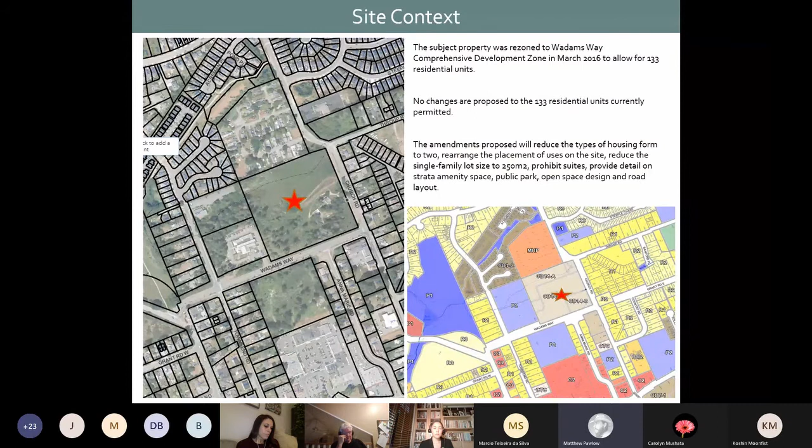The rezoning proposes the following map changes. With Area A, single-family dwellings will now be dedicated towards Wadams Way and Church Road, creating a perimeter design that interfaces well with the surrounding properties. Area B will strictly be dedicated toward multifamily units and proposed as townhomes. Area C will be dedicated as park, which was previously a multifamily site.

Area D from the current zoning will be removed and is being provided as the necessary park space, as previously mentioned, as Area C. So you can see on the right side of the screen, that is what the map is being proposed to change to in the zoning bylaw.

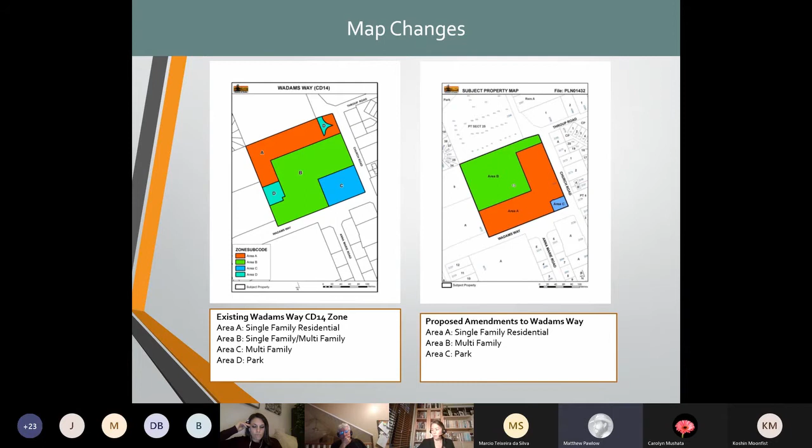As the current zoning is in place, allowing for 133 units, the proposed rezoning maintains the density and uses. Specific to housing form, only single family and townhomes will remain, with the removal of duplexes, apartments, cluster dwelling units, and assisted living facility. A reduction of 100 square meters to lot size is proposed, along with a 5-meter height reduction to multifamily units and an increase of half a meter in height to single family dwellings.

Value has been added with the allocation of strata amenity space for additional playground dedication. Parking requirements have been met, plus 31 additional on-street visitor parking spaces have been provided within the proposed developments.

The map here that you can see is the proposed open space area. So the blue dash line is the area indicated in the courtyard, which will be part of the private strata area for use by those residents. As you move to the right of that, there's a solid red lined area, and that's the proposed strata park area that will have a statutory right of way for public use, and it includes a children's play area, sport court, and lawn area, which is just under 1,000 square meters. So that would be open for the public to use.

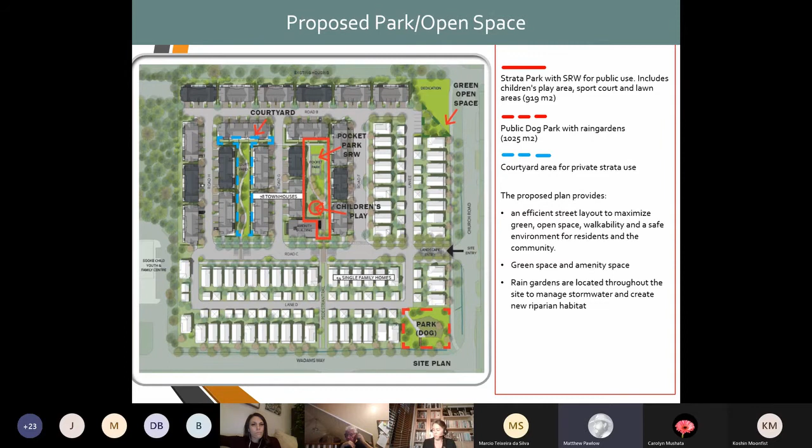This map here shows the proposed road classification. There's a mixture of public roads, which are that pink purplish color, as well as the blue strata roads, which would be maintained as part of the strata townhouse location within that portion of the proposed development. A TIA was provided and recommended single access off of Church Road.

With a 1.5 parking space requirement for townhouse units, there'd be 117 parking spaces located, as well as 2 parking spaces per single family dwelling, equivalent to 108 parking locations. As previously mentioned, an additional 31 on-street visitor parking spaces will be provided.

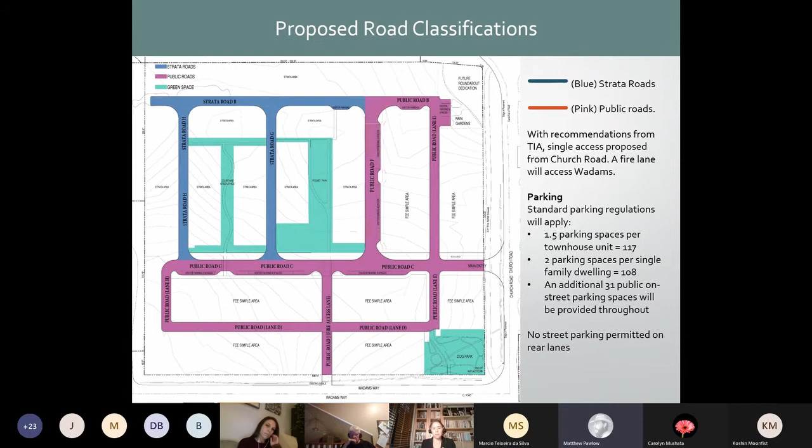On the environmental side, with tonight's attendance, the applicants will be presenting some further information on this. So I'll just at a high level touch on what's been provided and reviewed as part of the application.

Department of Fisheries and Oceans visited the site in November 2019 and reviewed the proposed ditch realignment works, which consist of removing the riparian vegetation adjacent to 2 non-fish bearing ditches, and redirecting those ditches into constructed vegetated swales and rain gardens. The combined areas of vegetated rain gardens and swales proposed will provide a 35% larger area than the original 2-meter stream protection enhancement area along the northern property line.

The 2020 Riparian Areas Assessment Report indicates that the replacement rain gardens and swales will provide riparian features, functions, and conditions equivalent or better than the existing situation on the property. The rain gardens will offer quality flow, insect drop, and other nutrients, as well as new habitat for amphibians. If rezoning is approved, supporting documentation will be provided with the development permit process, documenting this further.

Proposed contributions for the site: an affordable housing contribution will be provided from the applicant at a rate of $1,000 per unit for a total value of $133,000 for the developed site. 59% of the proposed development is in the form of multifamily residential use, which exceeds the minimum requirement of 25% from the official community plan.

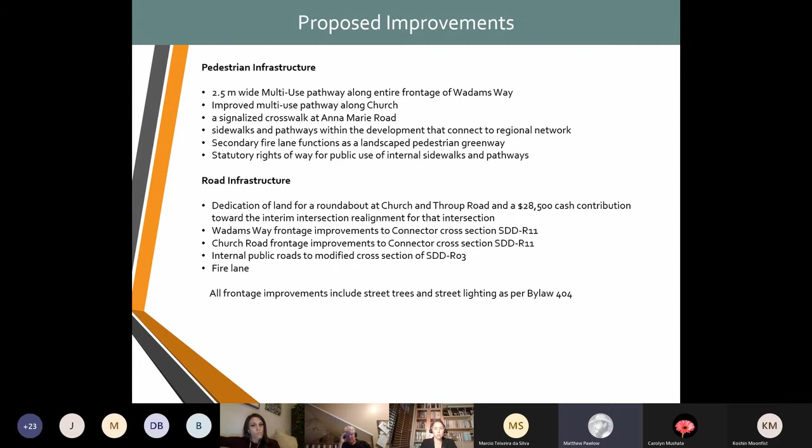Staff are recommending that prior to further consideration, an amendment be considered to recognize that the single family dwelling height is in fact 11 meters, not the 10.5 meters as currently stated in the bylaw, as well as the accessory buildings being in fact 6 meters, not 4 meters as currently in the bylaw.

Following that, staff are in support of third reading to the bylaw, and that council accept approximately 1,025 square meters of parkland dedication and accept cash in lieu for the remainder.

Prior to final adoption of the zoning bylaw, the owner must enter into a section 219 covenant to address the parkland dedication and construction, road dedication and construction, secure public use of strata green space, frontage improvements, servicing requirements, a pedestrian activated signalized crosswalk, statutory rights of way, park maintenance, and other necessary works and services. With that, that concludes my presentation, and the applicants and consultants are in attendance tonight. Thank you.

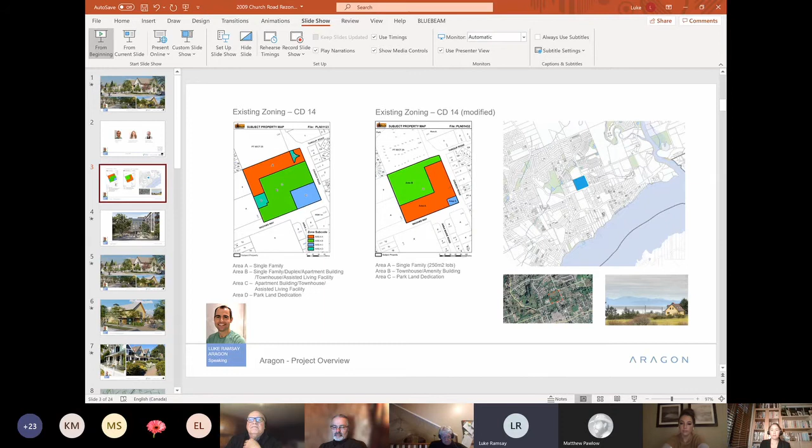Mayor and Council, thank you very much for having us today. We're here to present the project located at the junction of Church and Wadams. I'd like to start by introducing the team. Here today we have Doug Ramsey from RWA Architecture Group and Tam Bonamaison from Murdoch de Greeff Landscape Architecture. These firms are among the best in Canada and are exceptional at creating the highest quality designs, and we're very excited to have them as part of the team for this project here in Sooke.

This presentation is to present the proposed change in zoning from CD14 to a CD14 modified zoning. This change represents the same density, amenity contributions, servicing requirements, and land dedications as with the previous plan, but will change the configuration of the site plan and the housing type of the zoning from a mix of single-family, townhouses, and apartment buildings to small lot single families and 3 or 4 bedroom townhouses.

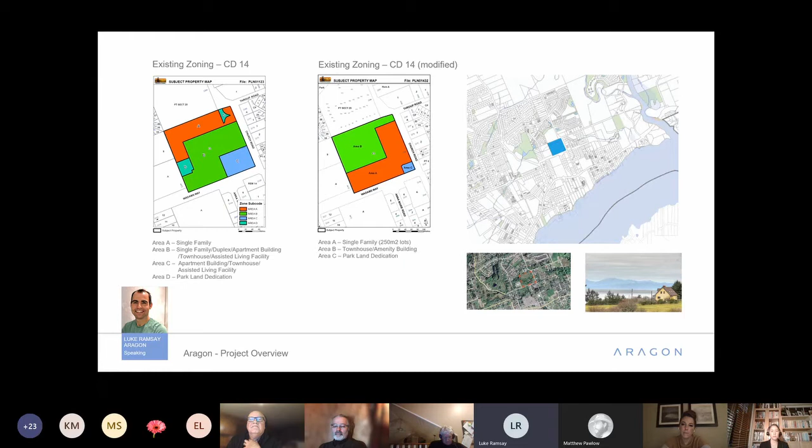First, I'd like to start with a little bit about our company. We've been building projects for 33 years and are primarily based in the Lower Mainland. We moved the project to Vancouver Island 5 years ago, where we started building our first project, Esquimalt Town Square, which is a venture with the Township of Esquimalt to transform their urban core by creating a new mixed-use space around their town hall. It's a 4-building project, which includes a new public library, uses a geothermal system for heating and cooling, offers EV charging for every residential unit, and is focused around a central plaza, which is a great location for residents to gather and access local amenities.

I bring this project to light because it provides a great example of our overarching goal here in Sooke, to provide needed housing with thoughtful design that can bring a meaningful change to the community.

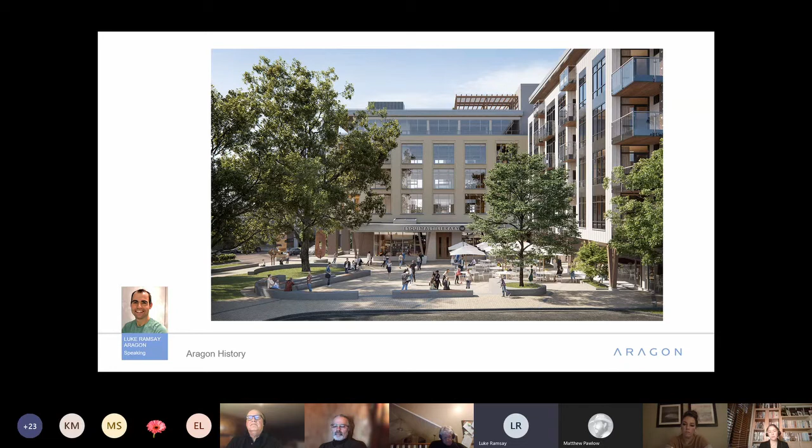Here in Sooke, we see ourselves helping build community, a community where young families can afford a starter home, a community where people can walk to the town center for groceries or through a local trail network to school, a community where people know their neighbors and feel safe. We plan to accomplish this by creating a vibrant streetscape through proven methods of urban design. This plan is perhaps different from what you're familiar with, but we hope this new housing type will demonstrate to other builders how to bring smarter growth to Sooke's core.

Through this development, we plan to bring housing choices for what is being called the missing middle. Typically, these are younger, working-class families who've traditionally been able to afford a home, but with the increase in land and construction prices, the large lots and big homes have priced them out of the market, leaving them with limited options. We're also planning on providing a new off-leash dog park, publicly accessible green space including a kids' playground, improved street frontage on Wadams with a connected multi-use pathway, thoughtfully designed landscaping and on-site rainwater management, economic growth through the creation of local jobs during construction, forward-thinking design, and quality, long-lasting homes.

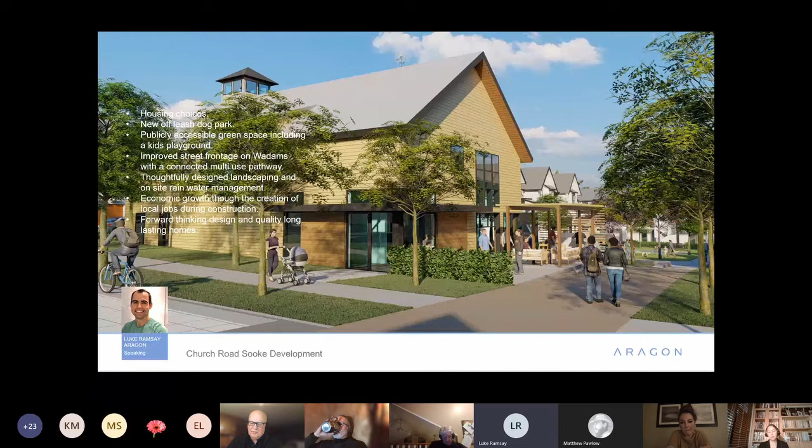With that, I'm going to pass the floor to Doug, who will walk you through some of the details of this development. Thank you, Luke. RWA has been involved in the design of housing and communities for over 30 years, and we are extremely excited to be involved in the design of this project with Aragon.

The site is in an ideal location in Sooke, only a 5-minute walk from the town center, nearby community services, parks, recreation, schools, and possibly a new library across the street on Wadams Way. A pedestrian pathway aligns the center of the site with Anna Marie Way, providing a direct connection to the town center and the new trail system on the north side of Wadams Way. We are focusing on providing green, pleasant pedestrian connections to encourage walking rather than driving, to support active lifestyles and opportunities for neighbors to meet.

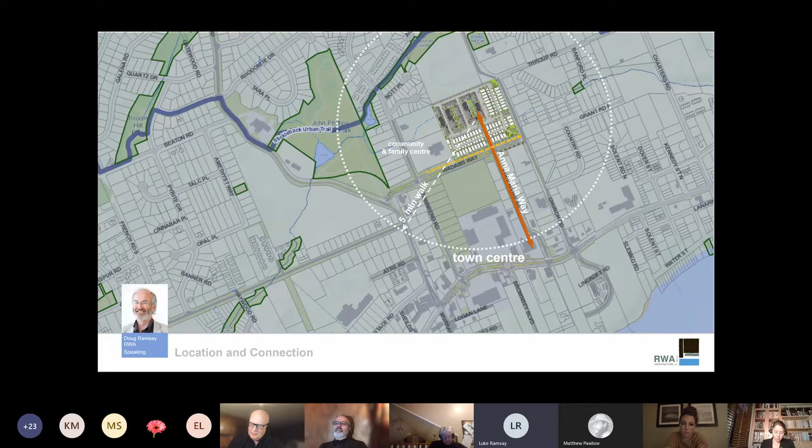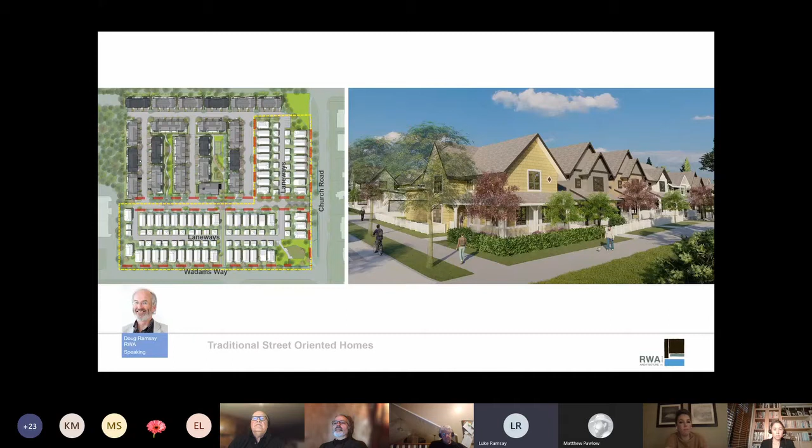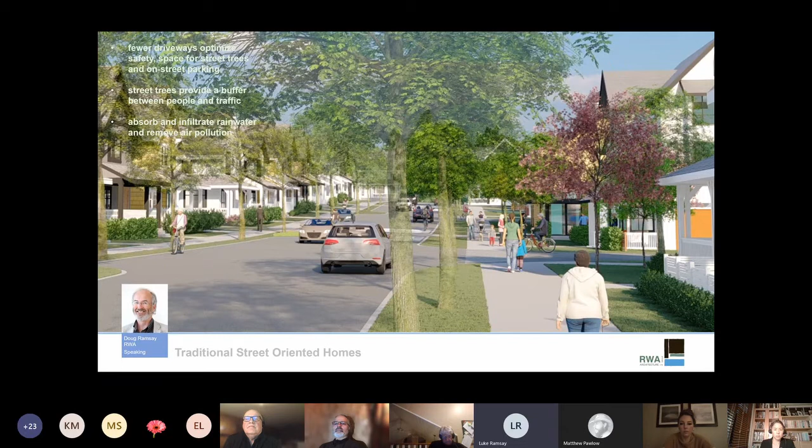The new homes along Wadams Way and Church Road are street-oriented single-family homes. This typology follows the traditional residential pattern of front streets characterized by front yards, fences, and gates, and back lanes providing access to parking and garbage pickup. This typology also supports walkability, providing opportunities for tree-lined streets with generous sidewalks and boulevards, fewer driveways, increased pedestrian safety, opportunities for street parking, and optimized space for street trees and stormwater infiltration, including runoff from the street.

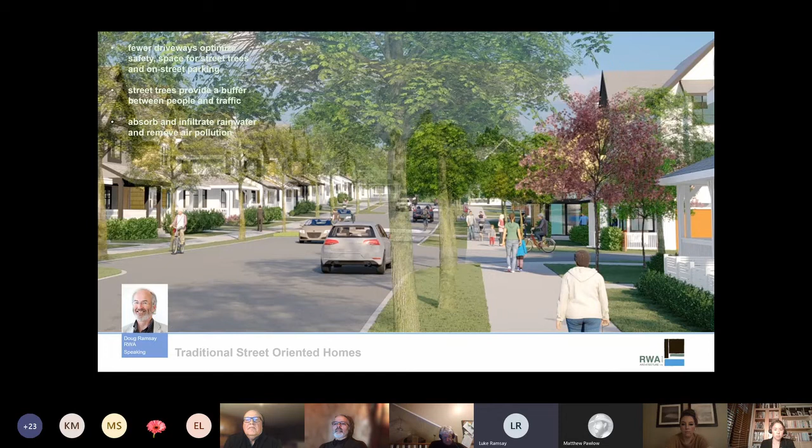Raised front porches contribute to a friendly, walkable neighborhood and provide a transition from the public sidewalks to the private interior of the dwelling. Porches also provide eyes on the street and a valuable covered outdoor space.

These homes are planned on compact lots with livable family-sized homes, featuring front and backyards and detached garages on back lanes. They provide the same amenities found in larger homes, but at a more modest scale.

The proposed lots vary in width between 30 to 40 feet. These fee-simple homes are opportunities for young families to start out, or for those wanting to downsize and stay in the community.

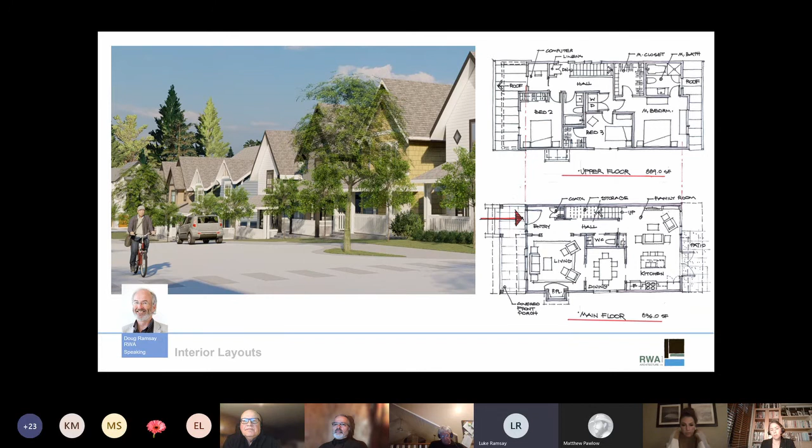They provide a more sustainable form of development using less land and fewer resources. These compact homes are comfortable and livable due to efficient interior layouts that provide a remarkable list of features and amenities typically found in larger homes.

Living rooms and family rooms open up to the outdoors, where porches, patios, and landscaped gardens become extensions of the living space.

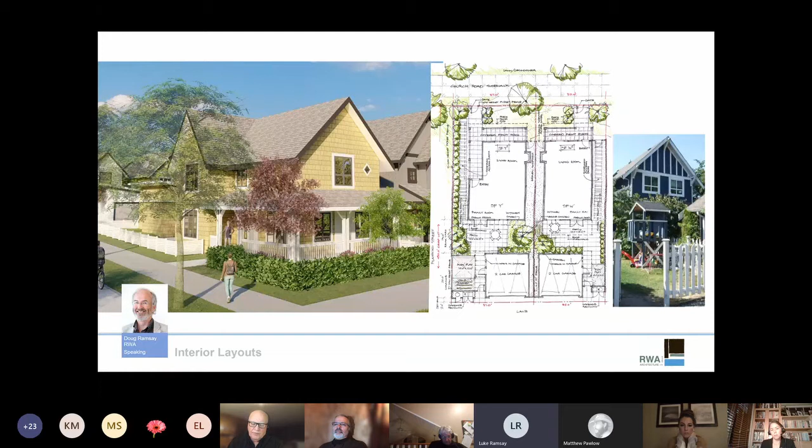RWA has been designing communities with Aragon based on these principles for the last 20 years. The 45-acre community shown here...

...of Port Royal in New Westminster was one of the first compact suburban communities in the Lower Mainland. It was hugely successful, winning numerous design awards for affordable housing and sustainability.

Our site plan features an internal layout organized around public green spaces and a major green spine or roadway. A pocket park and a green courtyard connect seamlessly to the network of streets and sidewalks.

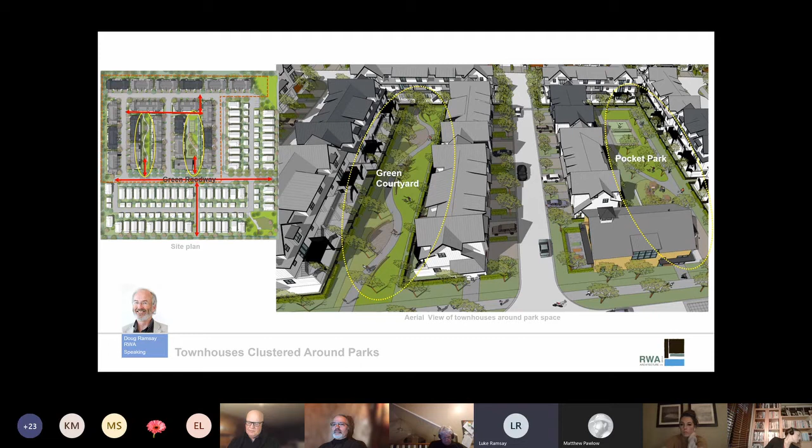The townhouses are located at the center of the site, clustered around the two park spaces. Clustering these townhouses around the parks creates a safe place for kids to play and families to gather.

The townhouses along the north and west side provide yards that are a bit more private in nature. The layout of the townhouses creates the potential for breakout areas within the units, including home offices.

This reflects our changing attitude towards working remotely and skipping the commute. The inspiration for the townhouse architecture is rooted in the simple rural forms and exteriors found locally and in the surrounding coastal communities.

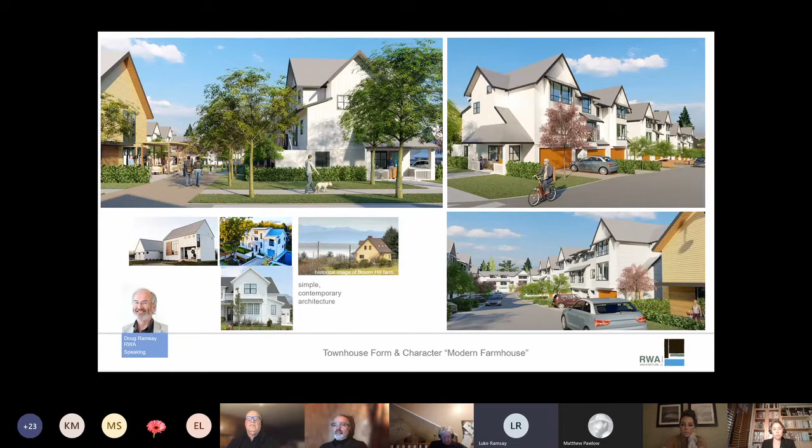The amenity building creates a community focus, situated on the main green spine and adjacent to the pocket park at the heart of this neighborhood.

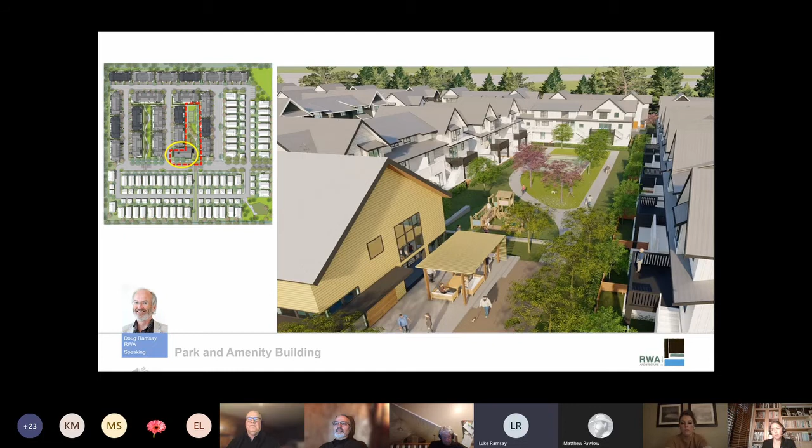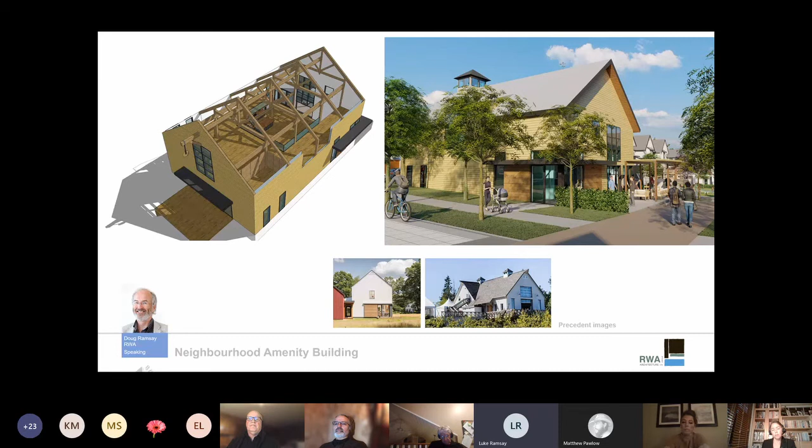This building was conceptualized as a barn with an expressive structure typical of traditional rural buildings. We are hoping to repurpose heavy timber materials for its construction.

The amenity building will accommodate a variety of uses and spaces to support community activities and functions. A large gym, community kitchen combined with a barbecue area, lounge, and flex space for breakout areas are included in the building program.

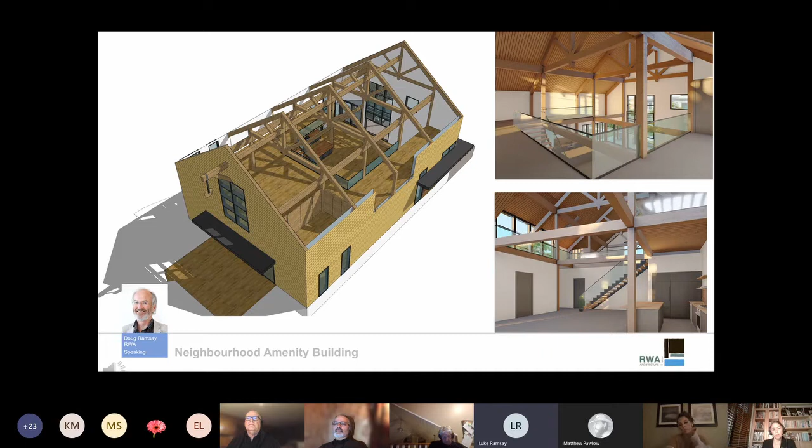We look forward to Council's approval of this project and trust it will make a positive contribution to Sooke and the surrounding community.

I'm going to pass you off to Tam, who will walk you through some of the details of the landscape design.

Thank you, Doug. Our firm, Murdoch De Greeff, specializes in integrated landscape and rainwater management design. With any site, we need to understand the natural processes and attributes of the site. If we know how they function, we can develop a design that works with these processes.

The landscape presentation will show you how the proposed design respects the site attributes and natural processes that are important for local ecology, for our neighbors, and for future residents of the project.

Our first step on this project was to understand the general drainage patterns on the site. We learned that there is a high ridge that forms a drainage divide, and that surface drainage is directed toward two separate low points on the east corners of the site.

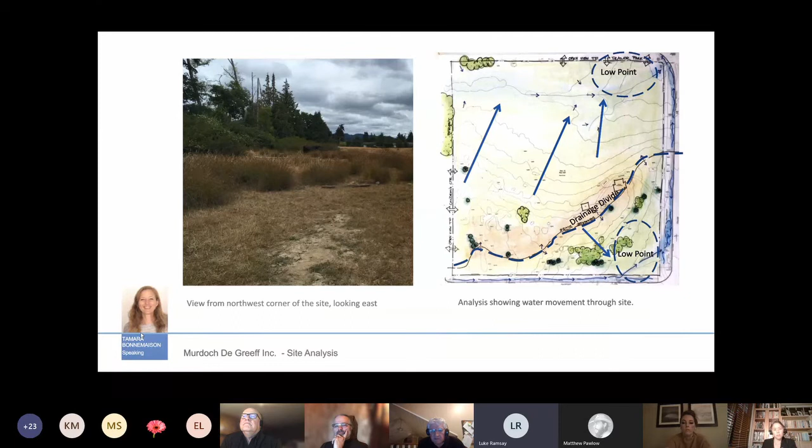The site has impermeable soils, so rainwater forms shallow puddles in the low points during the rainy season. We also learned that water leaving our site passes through a culvert and connects to Thrope Stream, which is a salmon-bearing stream.

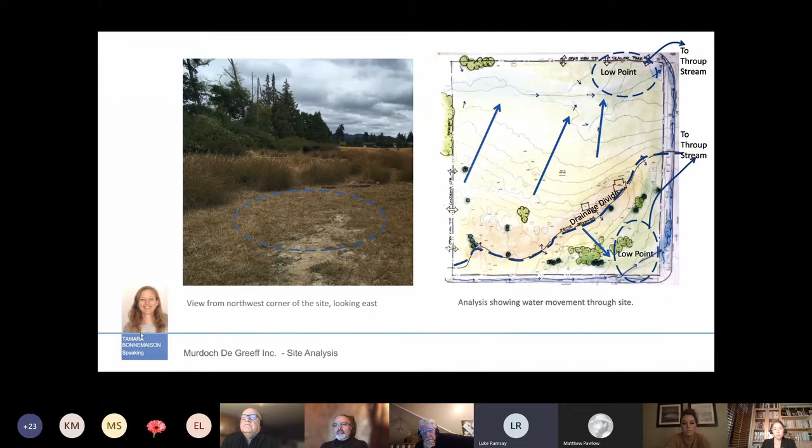Our project team is committed to realizing a design that provides clean water at the same flow regime to water bodies that are downstream of the site.

This slide shows our stormwater management approach. The green areas on the plan show rain gardens, which are designed to mimic shallow water drainage systems like those currently found on the site.

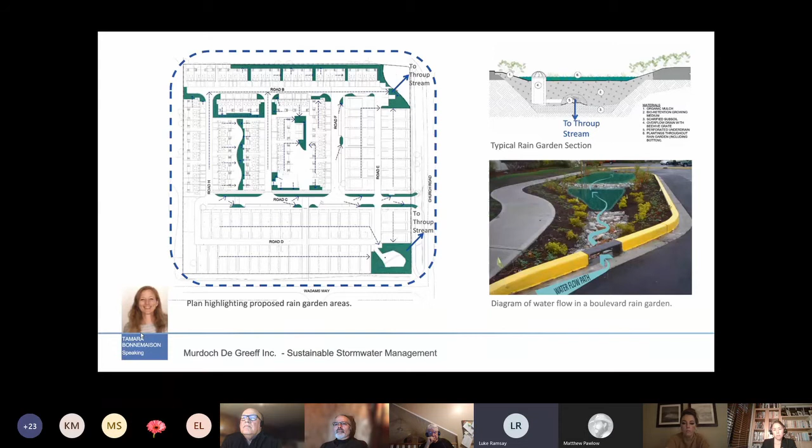Site runoff infiltrates through the rain garden soil and is biologically filtered, removing sediment, pollutants, and nutrients from the water. Clean water from the rain garden is then directed into the drainage system and eventually to Throup Stream.

The top photo in this slide is from the Eaglehurst development in Sidney. It shows how smaller rain gardens are integrated with boulevards and around the homes. The bottom photo shows a larger rain garden, similar to how we expect the two eastern rain gardens to look. These large rain gardens create a diverse park-like landscape.

And provide habitat for a wide range of birds, insects, and amphibians, while supporting downstream fish habitat. The developer has also started to engage with the Habitat Acquisition Trust to look at the possibility of relocating frogs and other species that may be currently on site to a suitable home during construction.

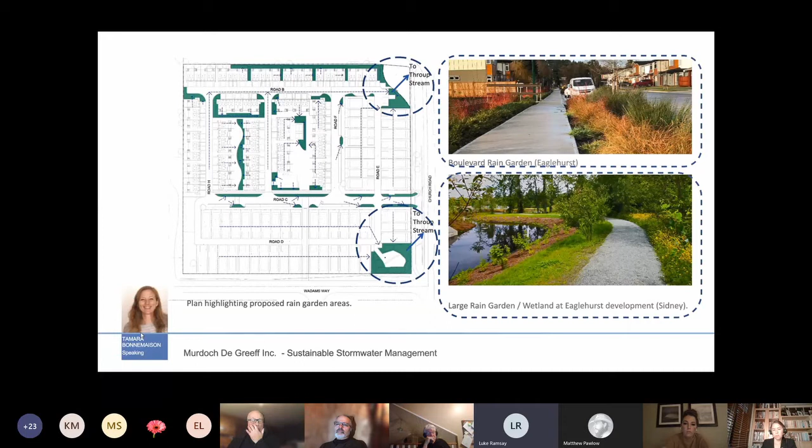I've gone on about the birds and the bees, but I also want to emphasize that we're thinking about people too. This project seeks to create a neighborhood with a strong sense of community, and the design for the outdoor spaces supports that. We've laid out the site to provide central green spaces in the townhouse blocks, which residents will be able to access from their backyards and via a network of pedestrian walkways.

The larger green space is adjacent to an amenity building and includes a playground and sports court, which will be open to the wider community.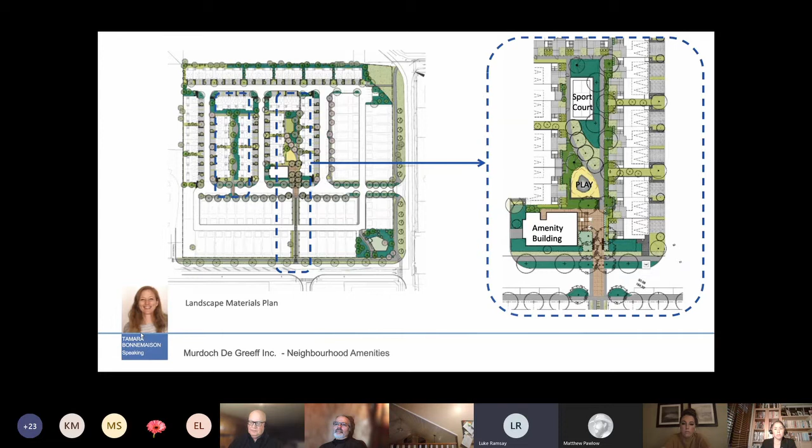We want this neighborhood to feel really welcoming. We're trying to design the types of spaces where it's okay for kids to have a water balloon fight in the common greens. We're thinking carefully about the layout and materials that will help us achieve that. For example, low picket fences with gates that open onto the common spaces allow for over-the-fence chats, and let kids easily run out to play without encountering traffic.

We also know it's important to provide a good balance of privacy, both for the future residents of this development and the neighbors of adjacent properties. We've included taller fencing between the proposed patios, as well as taller fences in areas that are adjacent to existing residences along the north property line.

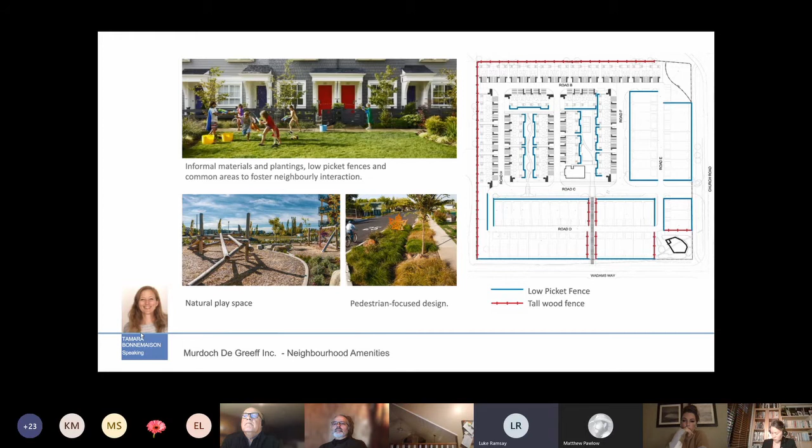The design for this project includes a public dog park at the intersection of Wadams Way and Church Road. We see the dog park as forming a welcoming gateway into the Church Road neighborhood, allowing residents of this development to get to know the wider community.

The dog park is being designed using natural, informal materials and slopes that provide fun opportunities for dogs to play while their owners interact. Plantings surrounding the dog park are designed to be very natural, low maintenance, and to provide a lot of habitat value.

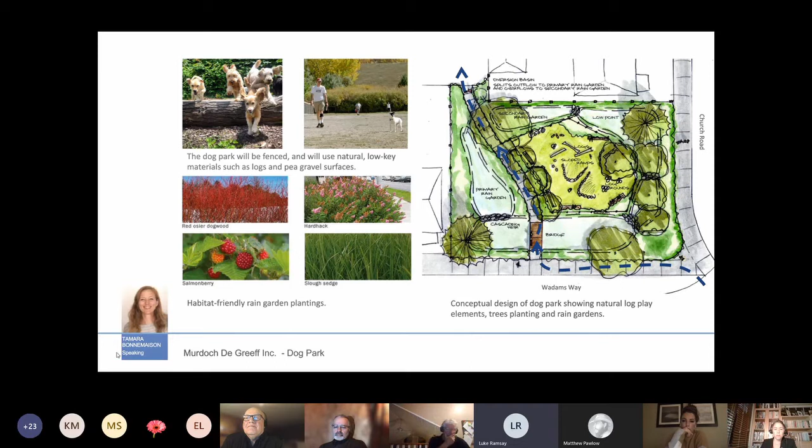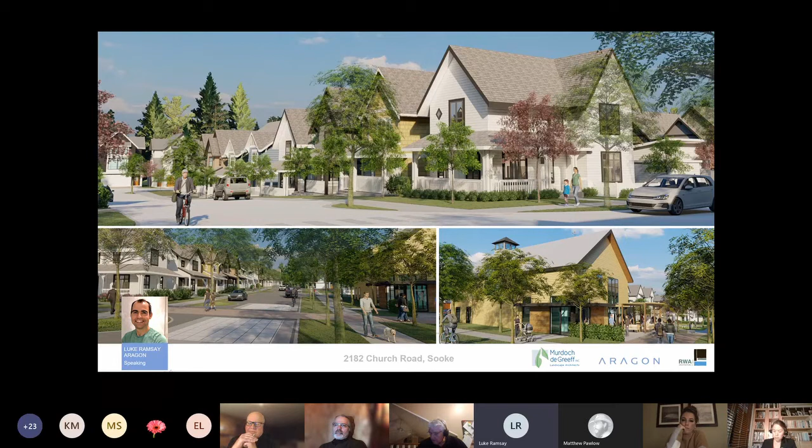Thanks, Tam. Aragon is not just a developer, but also a builder. On our projects, we act as a general contractor and hire local trades to complete the work. We want to stay in this community for the long term, and we see this project as our first step here in Sooke. I sincerely hope that Council sees the positive benefit of this project and grants our request to alter the current zoning to include this housing typology while keeping it within the allowable 133 unit limit. Thank you.

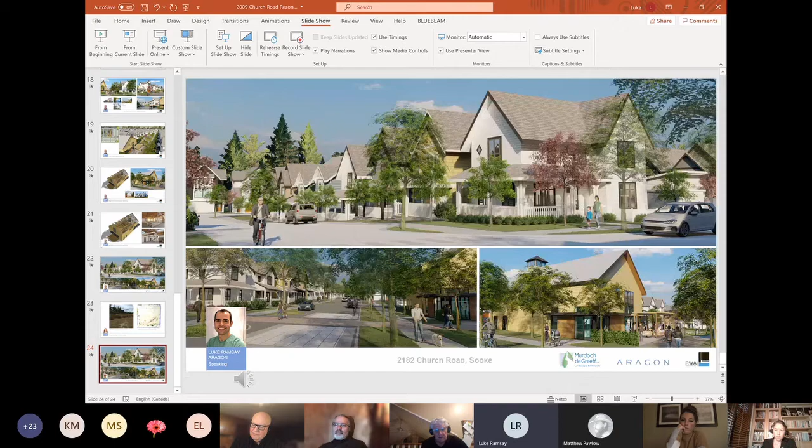The first one was about the rooms in the amenity room. So we envision a large part of the amenity space to be more open concept, so that people can work there, kind of like a Starbucks or coffee shop style. And then there's going to be two larger style boardrooms that you can book, so that if you're, say, a work-from-home consultant or something and you wanted to have someone come meet you on the weekend or during the week, you could book off those boardrooms.

To talk about the bike lanes, I think that was Tony's question. So there's going to be the multi-use pathway along the main street frontages. And then inside the development, because they're all publicly dedicated roads with publicly dedicated sidewalks, those will be at the discretion of the township. But the idea is that because they're publicly dedicated, the public can use them as they would any street in Sooke.

With regards to the riparian area and the steelhead trout on site, I'm going to refer to our biologist, Brian Wilkes, if that's all right, who might be able to answer a little bit about the process we've been through here and the potential of fish on site currently. Brian, you there? That would be me. Yeah, I've got my camera on and my microphone.

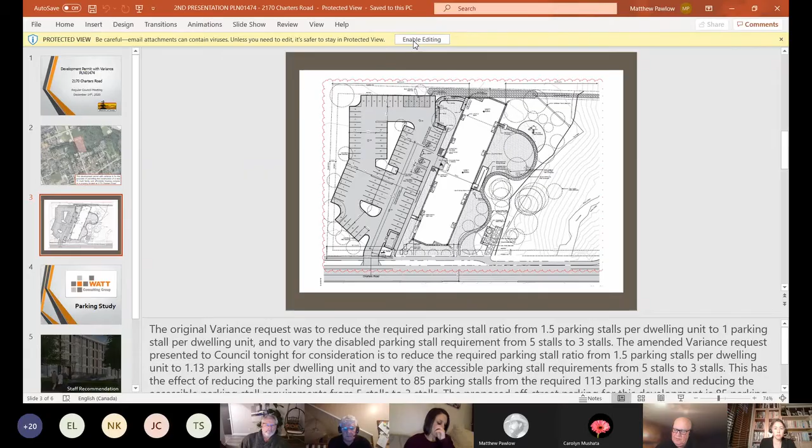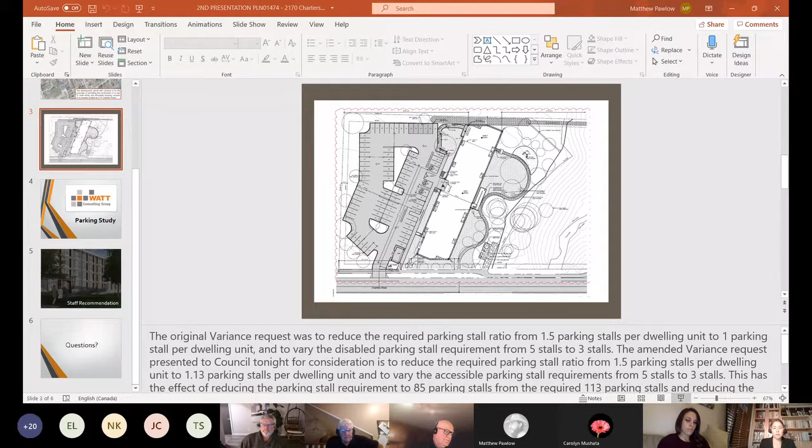Mr. Pawlow, to interrupt, it's just your slides aren't moving with the presentation. Were we supposed to see the new plan? Is there not a site plan in front of you? No, I just see the cover page that says development with variance in front of me. I don't see, it hasn't moved to the next. Okay, there we go, thank you. Mr. Pawlow, you're on your notes screen. Yes, I just exited to get it off the front cover there. So is the site plan up now? It is, but your notes are visible, it's not in presentation mode. Interesting. Is that visible now? No, now I see the squares, but I don't see your presentation at all. That works, I can see now, it's just the presentation. Thank you, okay, thanks for letting me know that.

So it should be the site plan in front of you. The original variance request was to reduce the required parking stall ratio from 1.5 to 1 parking stall per dwelling unit, and to vary the disabled parking stall requirement from 5 stalls to 3. The amended variance request presented to council tonight is to reduce the required parking stall ratio from 1.5 stalls down to 1.13 parking stalls per dwelling unit, and to vary the accessible parking stall requirements from 5 stalls to 3. This has the effect of reducing the parking stall requirement to 85 parking stalls in total, down from the required 113, and reducing the accessible parking stall requirements as mentioned.

The proposed off-street parking for this development is 85 parking stalls, comprising 75 general stalls, plus 3 accessible stalls, and 7 visitor stalls. If the variance request is denied, the developer will be required to provide 113 parking stalls as mentioned.

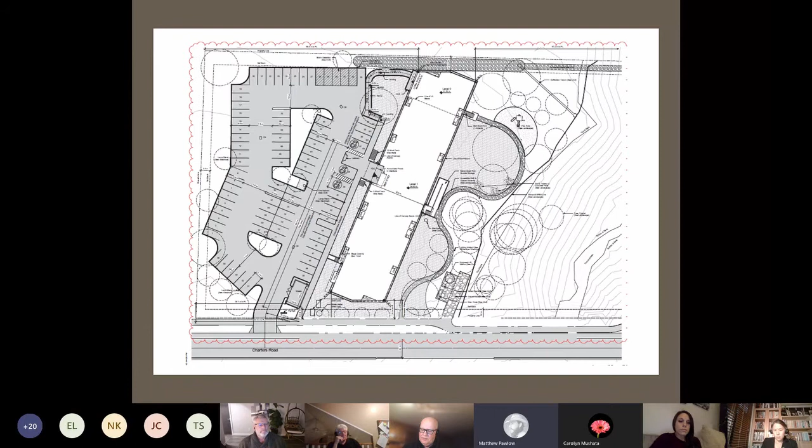A parking study was provided with the application, providing a rationale as to why the variance should be supported. This was prepared by Watt Consulting Group, and at the time had reviewed the zoning bylaw for the district and stated that the bylaw does not provide a specific parking requirement for affordable housing. Therefore, the site is subject to the same parking requirements as a medium density residential development, which is 1.5 spaces per unit. The expected parking demand was estimated for each tenure, resulting in a projected demand for 70 stalls in total. The average demand of 23 parking spaces for the affordable rental units and the average demand of 41 spaces for the near market rental units was identified in this study.

BC Housing is proposing to provide 85 parking stalls in total, with 75 for the general parking area, 3 designated accessible, and 7 visitor stalls. This is overall a 5-stall increase from what was previously presented to council on November 9th, a result of limited space within the site to add additional parking. Therefore, some of the green space was removed in the corner of this area to accommodate those additional 5 parking stalls.

This parking study also looked at the specific unit types being accommodated for, and based on the tenancy agreement that would be put in place, dedicated parking would be allocated specific to each unit, based on the study undertaken and in comparison to other studies provided in support of additional BC Housing projects within the region.

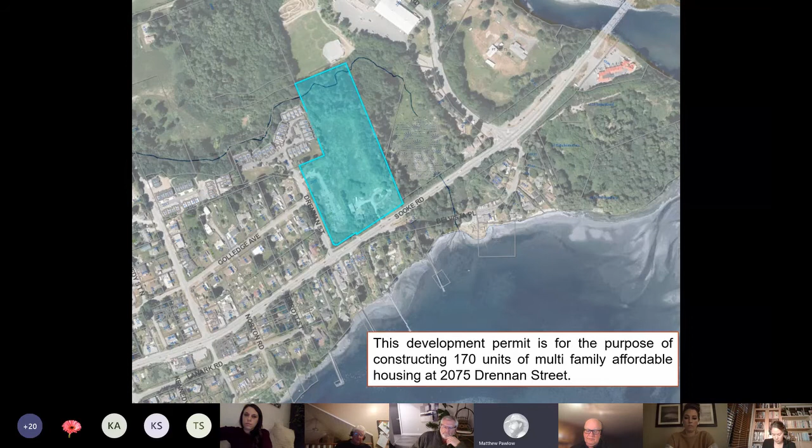All right, the districts received a development proposal for 170 units of affordable housing, which will be accommodated in 2 buildings located at 2075 Drennan Street. BC Housing is the owner of the site, and they've partnered with M'akola Housing Society to manage the site following construction. The applicants requested a variance for parking in order to facilitate this proposal.

This here is just showing a location and zoning for the proposal. Subject property is currently zoned RM2, your medium density residential zone, and encompasses about 3.4 hectares of land. The site's undeveloped and has road frontage on both Drennan Street and Sooke Road. Throop Stream is located to the north, a wetland area to the east, and a mix of single family and multifamily to the north and west.

The subject property can be serviced with sewer and is designated community residential within the community growth area of the official community plan. An objective of the community residential designation is to provide a range of high quality housing types, tenures, and densities which can meet the diverse needs of and attract individuals and families of varying income levels and demographics. Another objective is to provide affordable and attainable housing opportunities to meet the needs of various age groups, family types, lifestyles, and income groups.

Housing, not just affordable housing, has become a crisis in BC. A development such as this is the most efficient residential use of the land and existing physical infrastructure while providing infill and intensification along an existing transit route.

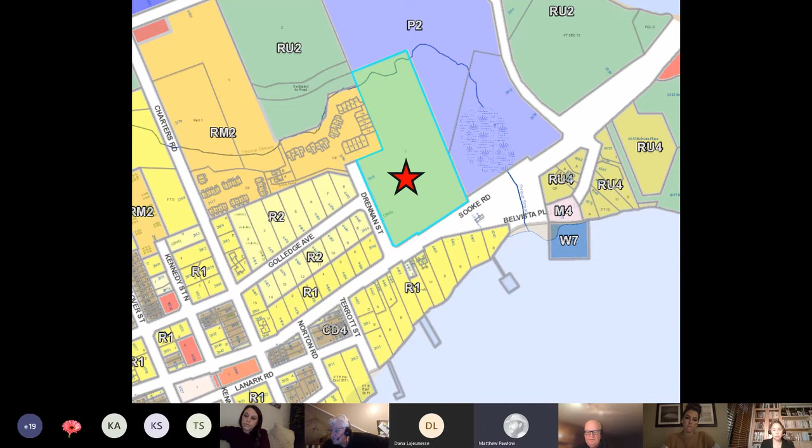The proposal includes 2 five-story buildings, each containing 85 units, located on the upper bench of the site, with the topography dropping steeply away from this area toward the wetland and Throop Stream. The proposal also includes an amenity building for residents to gather, with a community garden and a children's play area next to that. The landscape will also feature a rainwater detention pond that serves to improve stormwater management for the site, but also a contemplative area that includes seating.

The amenities proposed for the site far exceed the bylaw requirements and will serve to promote gathering and community for those that live there. The site design also includes an important trail linkage that will connect this site and the neighborhood to SEAPARC. Over a quarter of the site will remain in its natural state, including using some of the existing vegetation along Sooke Road, with development being clustered near the street and away from the sensitive areas that have been identified.

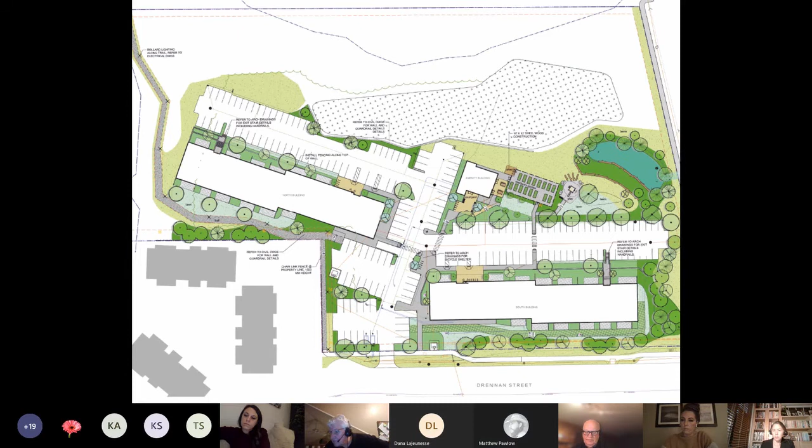The proposal was evaluated against the development permit area guidelines number 2 and 3, which focus on form and character, and environmental considerations for the site and its buildings. The architectural character of the development includes a blend of contemporary and traditional elements, including traditional horizontal siding combined with wood soffits, warm colored accents, and a brick base.

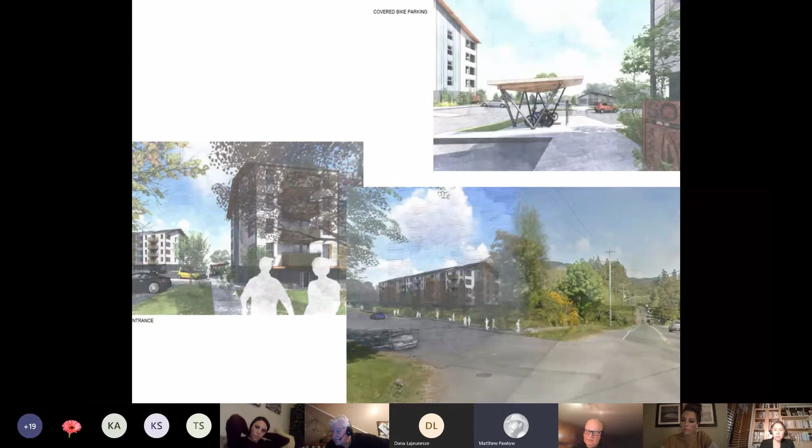The building materials and architectural features include aluminum trim, floating wood canopies at the entrances, balconies with 2 types of metal panels to create diversity in the facade, natural breaks in the facade, and the use of vertical joints using metal and wood panels.

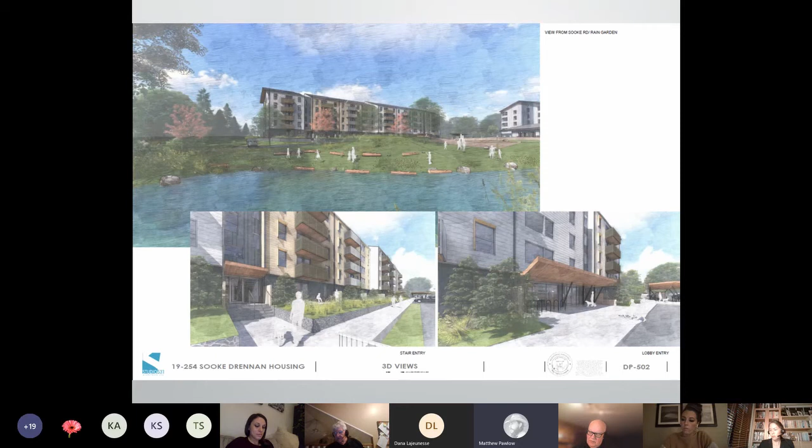The single-story amenity building is designed at a smaller scale and is centrally located on the site next to the garden area and outdoor amenity space. The landscaping proposed will be of extremely high quality, which will add to the enjoyment of the property to those that live there and will help to buffer the site from adjacent uses, including Sooke Road.

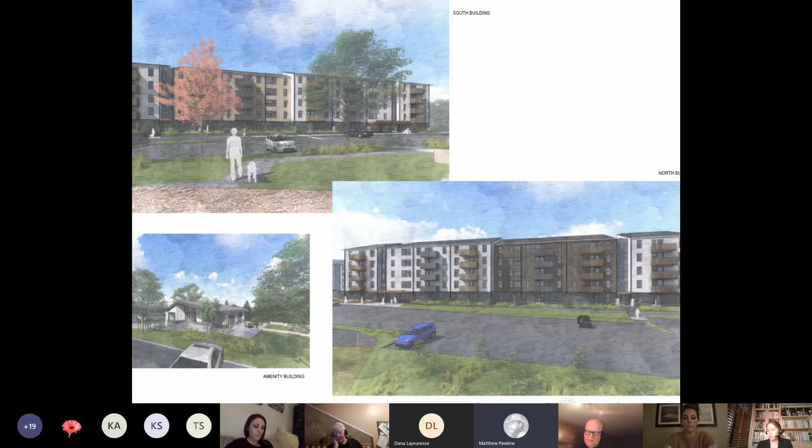Facilitation of the proposed development includes a variance request to decrease the parking space ratio from 1.5 parking stalls per dwelling unit to 1 parking stall per unit. The proposed off-street parking for this development is 179 parking stalls.

Visitor parking stalls shall be no less than 12 parking spaces located at the entrance of the site, plus 1 disabled parking space located at the entrance of each residential building, for a total of 14 visitor parking spaces. The site will contain the required amount of disabled parking spaces. While this is a substantial parking reduction overall, staff support the parking reduction request for the following 8 reasons.

The district does not currently have an affordable housing parking ratio in the zoning bylaw, where demand has been found to be substantially less than market housing, which is supported by the attached parking study prepared by Watt Consulting. 20% of the residents in this building will be in social assistance units, which means those residents are significantly less likely to own a vehicle.

Third, there are 2 riparian areas and an archaeological sensitive area located on the site, combined with steeply sloped areas, all of which are being avoided with this design. Fourth, the on-site amenities for residents, which include gardens, amenity building, play areas, and green spaces, will be impacted with increased surface parking.

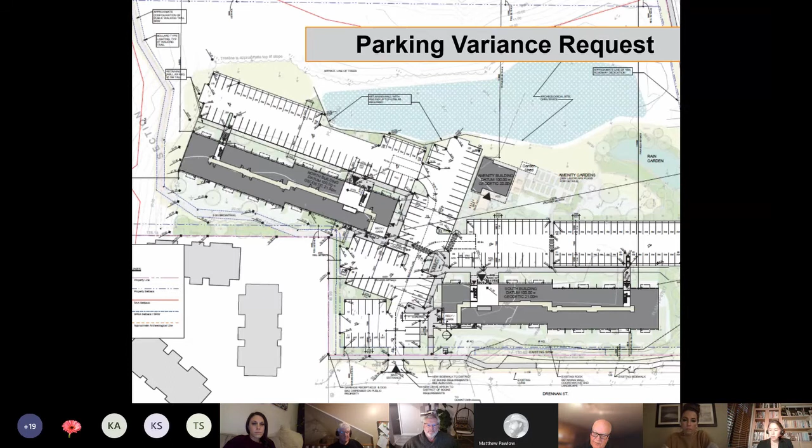With that, staff is recommending approval of the development permit, including the parking variance request, as affordable housing is desperately needed within the district of Sooke, and the proposal meets the development permit guidelines of the official community plan. With that, that concludes my presentation, and the applicants are in attendance to answer any additional questions that council may have. Thank you.

Okay, thank you, Mr. Pawlow, for the presentation. Given that the other one was just approved, part of the infrastructure improvements here involve the signalization of Charters, and with that, Drennan would become a right in, right out. So with folks leaving this particular project, if they wanted to turn into Sooke, they would go up Golledge and then to Charters and then turn, and the Charters signal light would allow for movement in all directions, because right now Charters is strictly a right in, right out only.

And then for pedestrians, I'm assuming they would be able to cross safely at Charters once the new signal light is in place. Charters will also be upgraded with a dedicated sidewalk. So can you please just confirm the infrastructure improvements that are coming now as a result of the Charters signal and this project now coming before us?